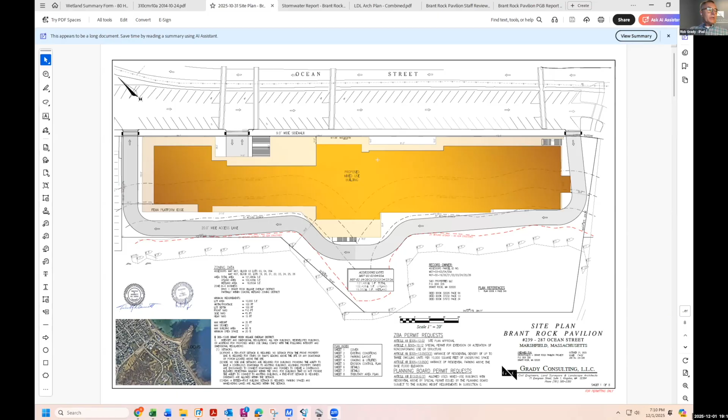The main building is shown in the golden color here, and the FEMA platform that wraps around it is shown in light brown or tan. As Jonathan mentioned, we're proposing 207 parking spaces. Let me get to the correct sheet. Here's a depiction of the buildings that would be coming down—a number of existing buildings that would be removed for the proposed construction.

Here's a color-coded layout of the proposed parking. The blue represents the 102 dedicated parking spaces for the residential units, which equals 1.25 spaces per bedroom, or 2.26 spaces per unit. We'd be connecting to town water and town sewer, both available at this location.

The drainage on this site is a bit challenging. It's an area of high groundwater, so there's not a lot we can do to provide a conventional detention basin or infiltration basin. What we're proposing is to connect stormwater from both the access drive and the parking below the building into a series of catch basins and manholes, and then into a system called a storm trap—a large concrete holding tank.

Basically, one of the tanks has 6,657 cubic feet. The other one has 27,420 cubic feet. So all in all, it's about 250,000 gallons of storage capacity within those tanks.

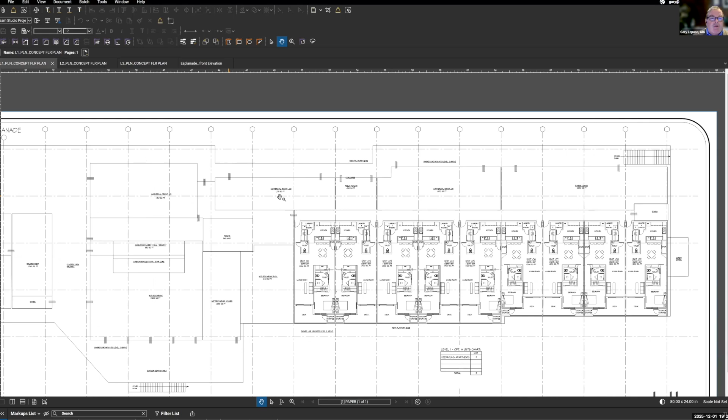So as people are making their way past perhaps an ice cream store or a sundries store, or some sort of tenant looking to occupy this space, we'll also have public toilet facilities available for pedestrians walking along the boardwalk.

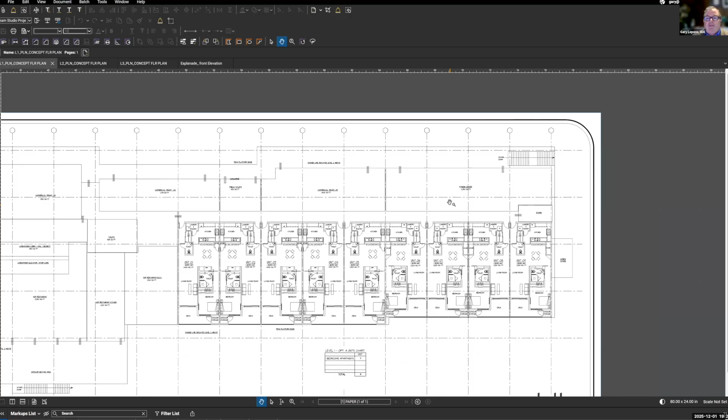The last two spaces include an additional commercial tenant space, and one of the amenities we're proposing for this project for the tenants above is a fitness center. We see great demand for higher end amenities like fitness centers, along with access to the beaches. So the last commercial space on this first FEMA platform would be a fitness center.

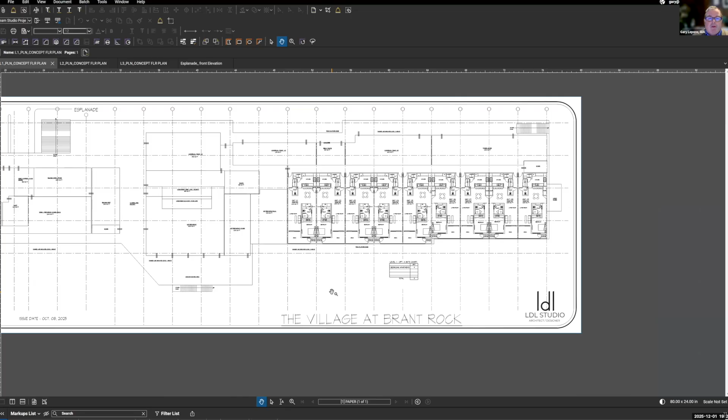You do see in our drawing that we're showing 9 single bedroom units. These have been part of our discussions with the client and with the Dropoulos family for their needs.

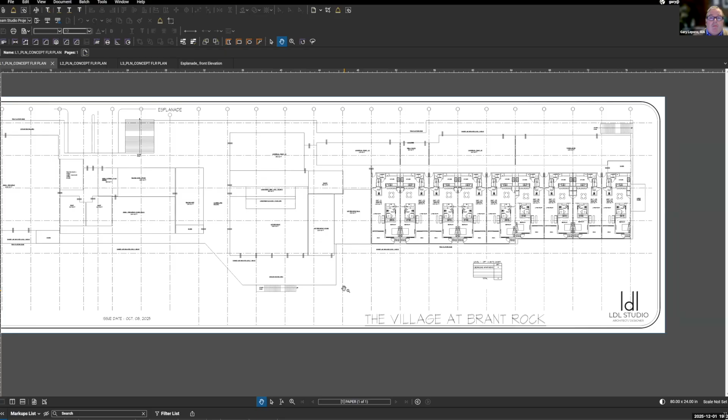Perhaps one of the needs may be that employees who need a place to live within the community — this might help as an employee benefit, where there's an apartment or single bedroom unit available to them.

So basically, scanning out to the larger picture, you'll see the relocation of the 2 restaurants as needed. We're all familiar that the Hop is literally at grade, so it floods in any flood situation. Bringing it up to this FEMA platform is required, and it's one of the primary aspects of this project: relocating the 2 restaurants along with all their supporting program, back of house, kitchen, and so forth.

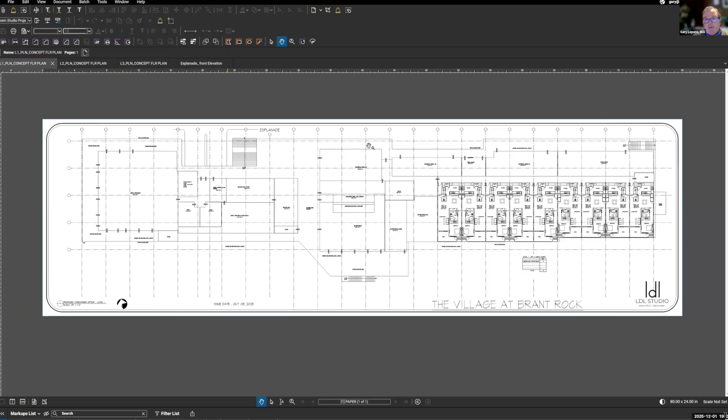And then the addition of smaller tenant commercial spaces along the front that can take advantage of somebody walking along, up the staircase, perhaps getting an ice cream or something else, and then departing.

As I move to the 2nd floor, you're going to notice that we've created 36 total 2-bedroom condominium units. However, what we've decided to do as part of the design strategy for this project is structure the condominium units as townhouses.

So one compartment of the unit is on the 3rd floor, while the 1st or 2nd floor is the main floor of the second unit. Every single unit within this building will have a townhouse configuration.

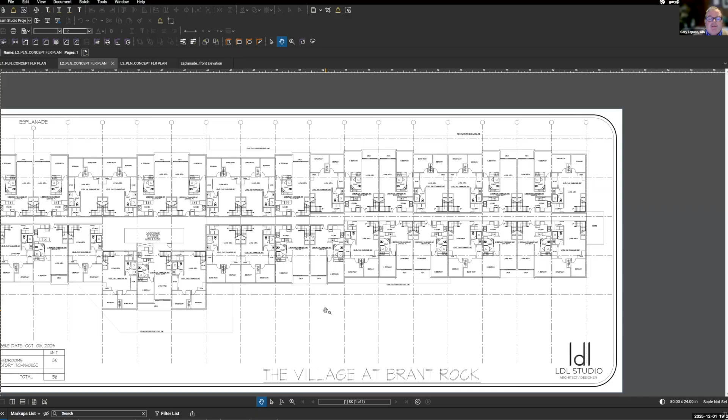One advantage of doing that is we've located 18 entrances on the 2nd floor and 18 entrances on the 3rd floor. So rather than having a corridor full of entrances or doorways, we've divided the design so you could enter your living space and go up or down a set of staircases to the bedrooms.

One of the amenities we'll show in a second is we're also trying to propose deck spaces along all of the units, so every unit will have a deck space associated with the living space.

This helps us twofold: one, it gives the occupant or tenant an outdoor space to dwell in, and second, it helps dramatically cut down the mass of the facade. Rather than doing a flat facade with just punch windows, we're trying to create a vernacular that matches a typical seaside aesthetic with decks and overhangs.

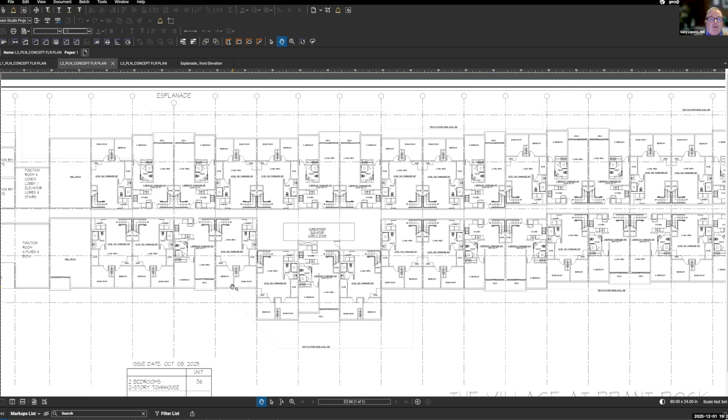As I'm moving down, you'll see amenities for the condominium area, including large laundry service areas.

You're probably familiar that the Venus 2 has a 2nd floor function space in their existing location, and we're proposing to relocate that function space here on the 2nd floor with a roof wraparound deck, so that for a wedding or function wanting a pre-function venue outside before bringing people in for dinner service, they now have the advantage of a full deck wrapping around this facility to pre-function outside.

We also, in order to support that function space, have created a kitchen and back of house area that will support the function space, as well as bathrooms, and an elevator core that connects the entire building from grade all the way up through here. That is basically the configuration for the 2nd floor.

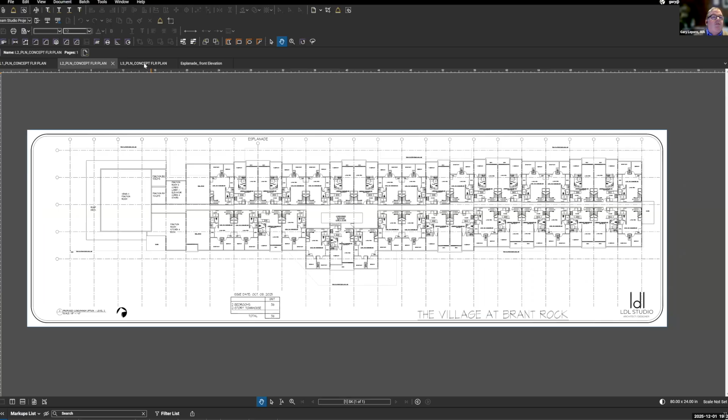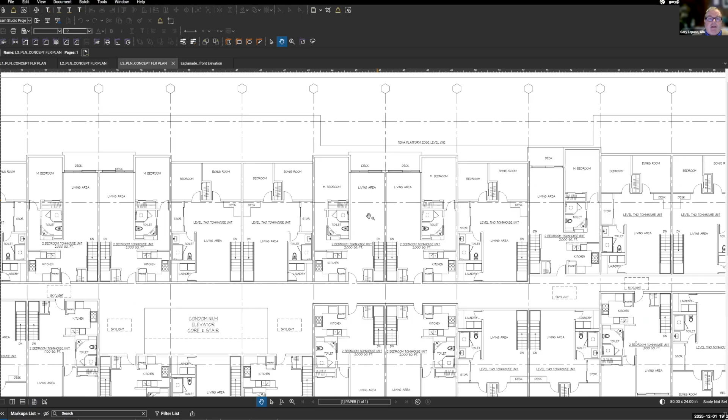Moving up to the 3rd floor, it's almost a mirrored image of the 2nd floor. We've created this duplex townhouse configuration for our condominium units that allows each tenant to circulate up or down depending on where their entrance is, with 2 bedrooms below or above. We've stacked deck spaces with large glass openings off the living areas so occupants can go out to their deck and enjoy views to the Esplanade or back to Green Harbor. At the 3rd floor, we're proposing a small rentable sky bar space with 180 degree views of Green Harbor, as well as the front ocean and bay views.

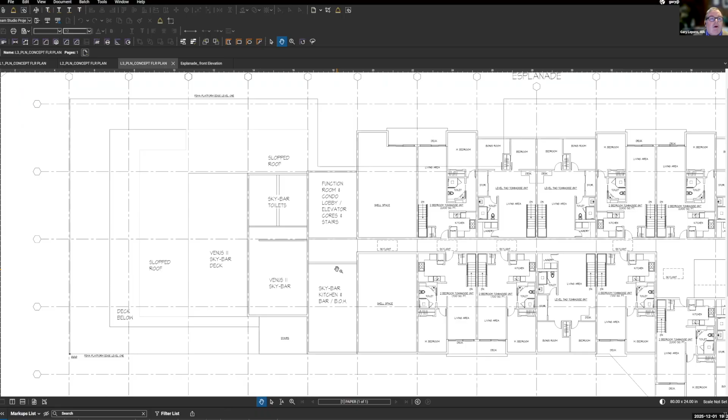This is another space that could be rented by tenants in the building, or rented as a smaller function space for a retirement party or some other smaller venue that doesn't want to rent the entire function space. In the long term, this might also be a place the family could look at programming or functioning differently.

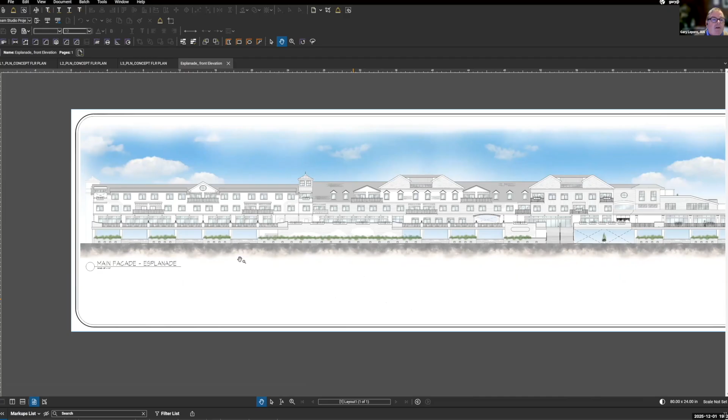My final view that I'd like to show the board, as well as those participating this evening, is our elevation from the Esplanade looking back at the building. We've worked very hard to create that New England vernacular, showing dormers and shingle style design with railings and punched openings for the tenants to live in. Another important feature is the colonnade along the facade on the first, or FEMA, platform, where those commercial spaces are set back 10 feet so we have a covered walkway as well as an open walkway.

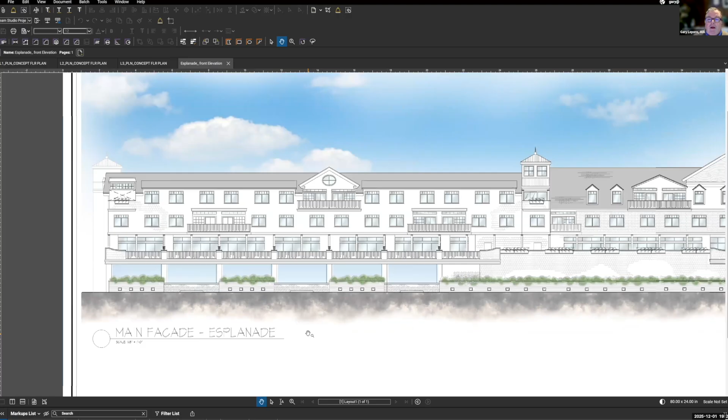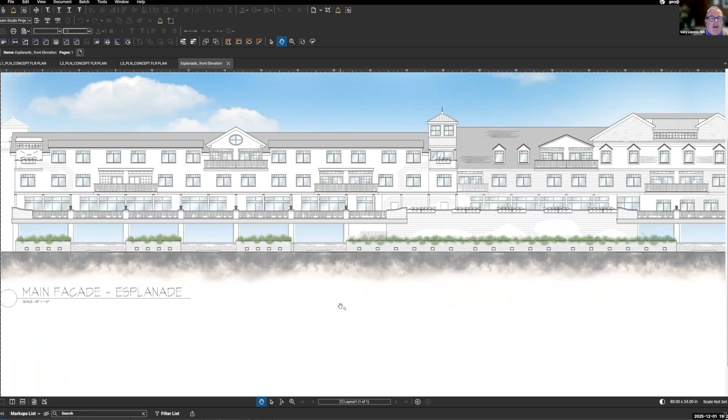So as people make their way from the restaurants, perhaps to get ice cream or head to their cars, they can walk along this colonnade, much in the tradition you'd see at several high Victorian seaside hotels along the coast of Cape Cod, Martha's Vineyard, Rhode Island, and New Hampshire, where grand old Victorian hotels have a continuous colonnade along their main serviceway.

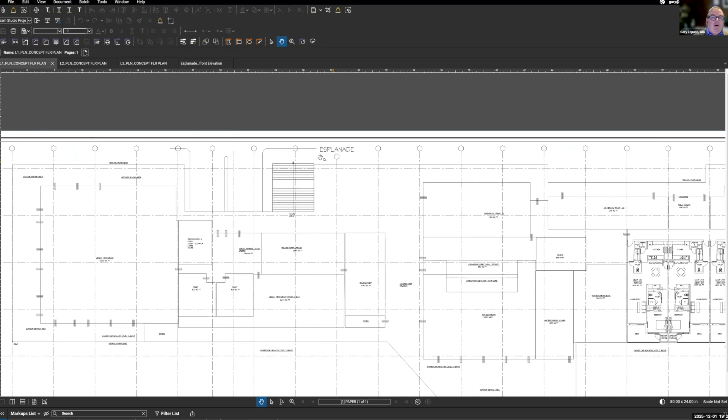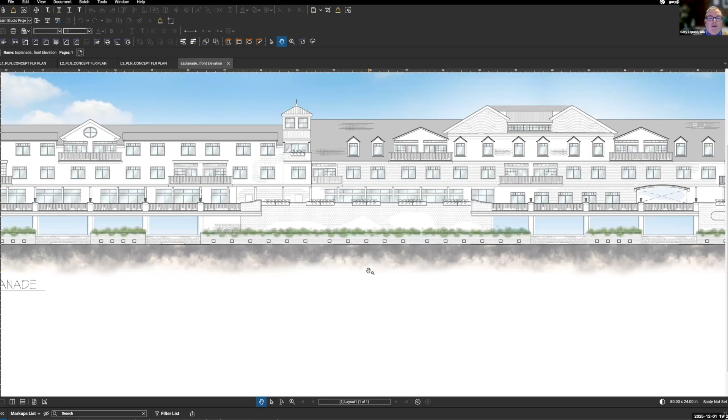One important thing I'd like to bring to the board's attention, and everyone viewing, is that we worked very hard on the floor plan to not just give a solid edge along the whole facade of the Esplanade. We're bringing that edge back as much as we can in certain places to break the volume down. On the facade, we might create a green wall or introduce vegetation that could climb along it. This might be a perfect opportunity for an old-fashioned wooden sign about Brant Rock and the area. The important thing is showing ideas of window boxes, greenery, and pushing the facade back wherever we can, introducing much more of a pedestrian scale to this project.

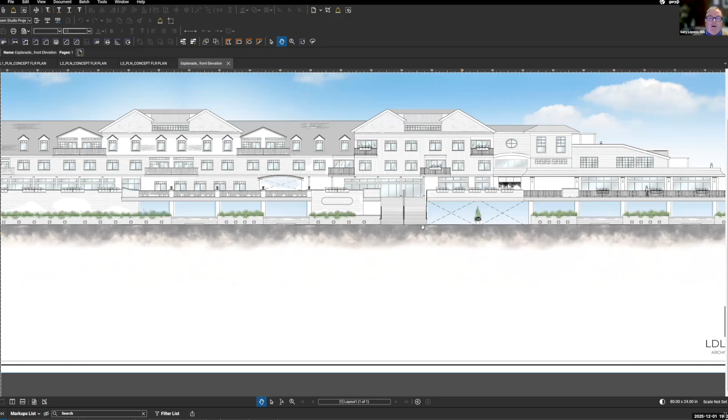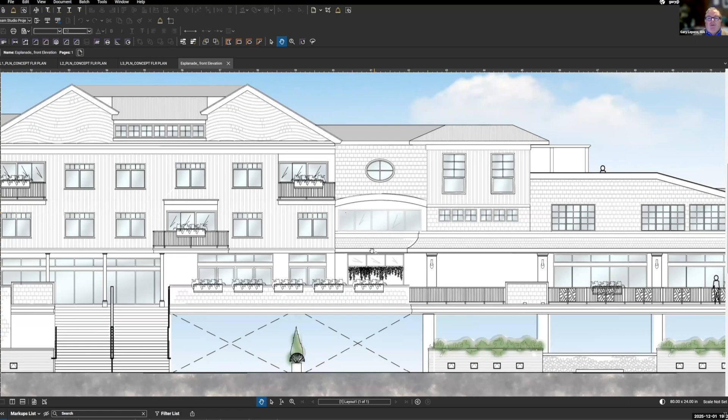As I mentioned, here are the entrances to the parking area under the FEMA platform. There's the grand staircase leading up to the two restaurants, and here's the open archway that leads all the way back to the rear of the building. We're working hard to introduce flower boxes and greenery as much as possible. Another consideration is the types of materials, looking at ones very much in keeping with that New England vernacular.

That is the conclusion I have for you so far. I thank you for letting me present. I'm going to stop sharing.

Okay, thank you, Gary. I believe there was one more presenter. I believe that might be it. We were hoping to hand it over to the board to get some input. We're certainly not ignoring the comments from Greg and Pat, but we'd love to take as many comments as we can from the board tonight and take that back as homework, along with what we already have to do, and come back to you. Okay, thanks, Rick. Greg, do you want to go over any of your comments, or should I go to Pat Brennan?

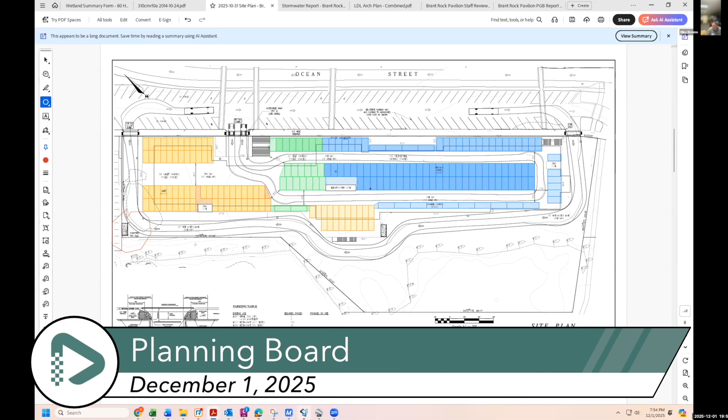Yeah, so really what it comes down to with the dumpster capacity, from what we've found, is frequency of emptying. This is a standard size that we use on commercial developments. There's two of them proposed here. And then we have to schedule out the frequency of pickup, whether that's two or three times a week.

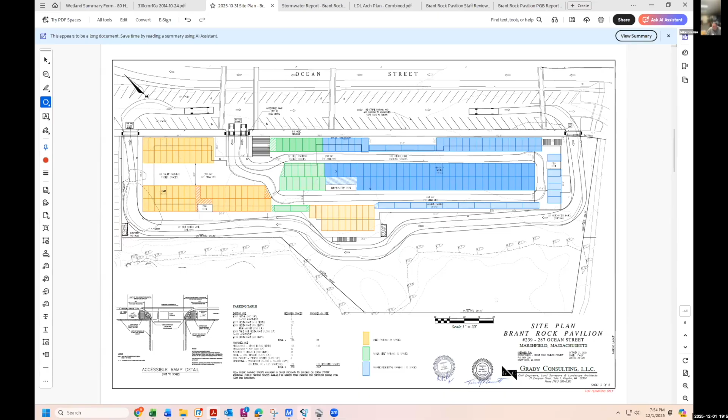All right, thank you, Rick. Mary, I've got you for about 30 more seconds. No, that's fine, and Rick just led right into it.

So Rick, it kind of goes back to my whole thing about maintenance. Now we have public bathrooms being proposed. But when I went in and talked to Greg and Karen last week, I mentioned we saw a mattress and box spring sitting on that property for almost five or six months now. And that's with only a few folks living there. I think you had mentioned nine apartments, I thought there were maybe only three or four legal apartments, but whatever, there's not that many. Now we're going to have many more people with additional businesses, so I just question the maintenance and how this is going to be run.

It's going to be a condo unit, but it's going to have restaurants attached. As a property owner sitting across the street, I just question how is this all going to work and operate from a maintenance perspective. And I guess that leads back into the trash. Is it once a day it's coming, getting picked up? I guess that all goes back into Rick's analysis and how you manage it. I don't know who does what.

Yeah, as we get further along here, understand that what we've submitted is probably a 60 to 70% complete design plan, and we want to incorporate comments - the whole planning process is a building process. We're building this plan much in the same manner that they'll ultimately end up constructing the building someday. So as we zero in on the footprint here, now we're ready to pull in structural, and they can tell us how many columns, spacing of the columns. We did some preliminary planning on that - we're hoping that will land on the lines of the parking spaces, basically. But we understand we still need to provide more detail on that to back that up for you.